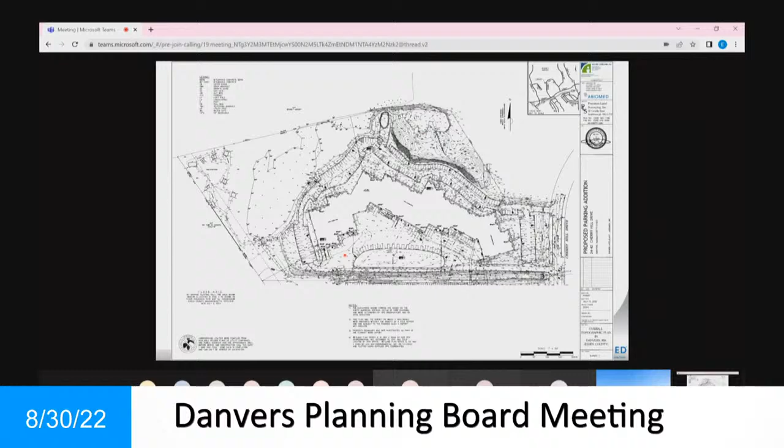Here is an overall schematic view of the existing conditions of the entire site. Just to orient the board more specifically, I'm going to trace out the limit of work where the project is, so if you could follow my cursor. Just to be clear, the entire site will not be disturbed as part of the scope of this project. The only area that's going to be disturbed is within the project limits for the parking lot expansion project. So just a closer view of the same area that I traced out. This is the project limits. This is the area where there was a mulch mound that, as you're going to see in the next slides, is going to be transformed into an expanded parking lot with site amenities.

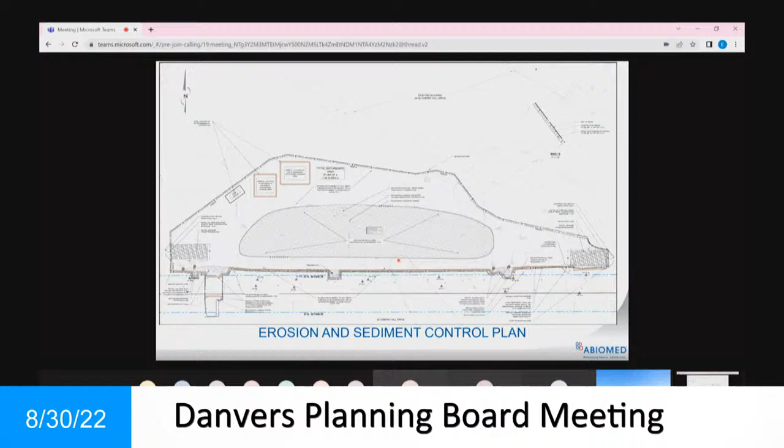Some other site amenities include lighting. We placed lighting in a fashion to promote safety within the parking area. I believe we have our lighting consultant available that could embellish on that. They weren't able to join? Oh, okay, I apologize.

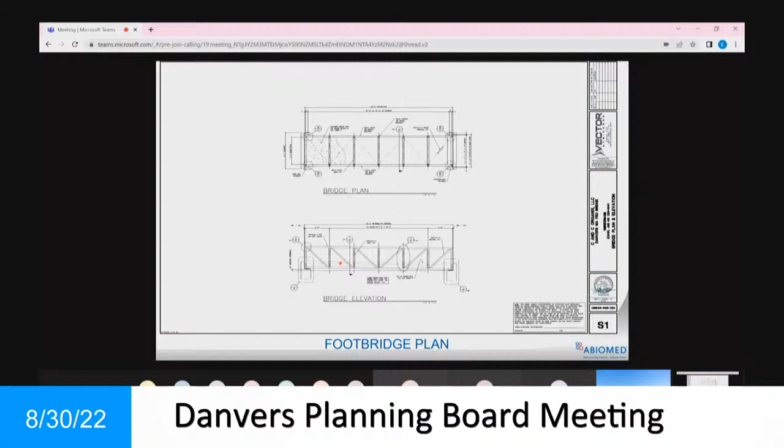It's considered a redevelopment, and it satisfied the conditions and regulations by the local town. It was vetted by the engineering department, and it turns out that we satisfied all their questions and concerns. I just received an email with 3 de minimis comments from the engineering department that I'm confident we could rectify via conditional approval.

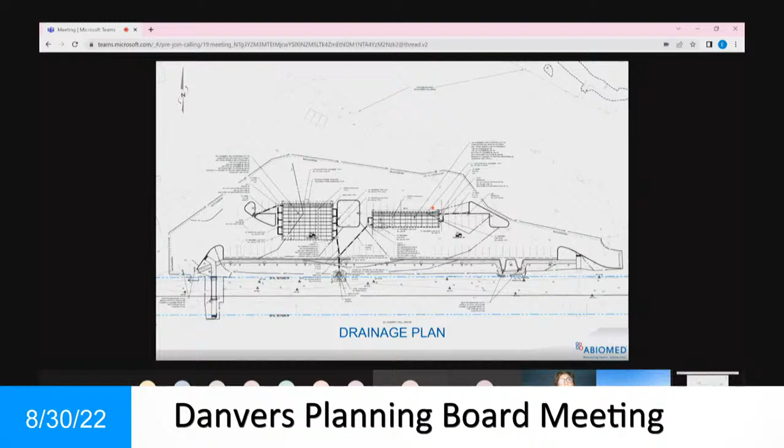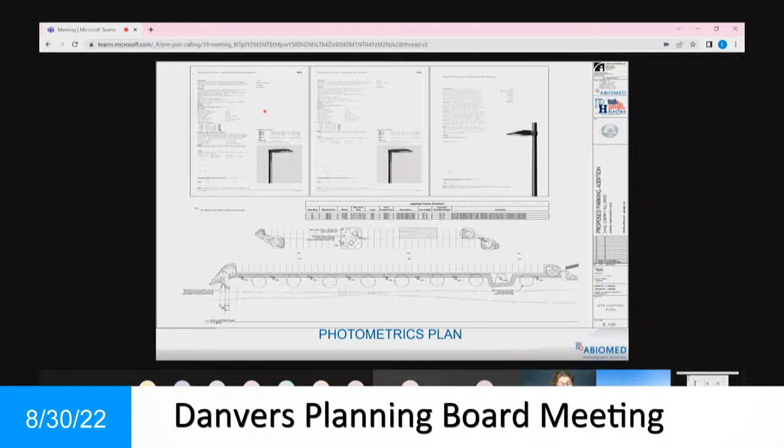The specifics on the lighting is here, and we'll open it up to the board once the presentation is over if there's any questions. This is a photometrics plan. The main purpose of this plan is to ensure that light coverage is in a fashion to facilitate safe illumination. The foot candles on the property line are within standards. It's less than 1 foot candle, which is pretty much a typical standard for a photometrics plan. And I believe that this plan satisfies the requirements from an illumination standpoint as depicted in this slide.

I'm going to turn it over to Shara Lewis, who is the OPM of the project, and she's going to go into further detail relative to the landscape plans. Thank you.

So the plants in the planting bed were picked to be pollinator friendly, which was something that the Conservation Commission wanted. And anywhere where we're disturbing within the buffer zones, which is again a Conservation Commission requirement, we'll have that conservation seed mix. We didn't put the details of the plants here, but I'm happy to answer questions if people have questions about the plants. I'll turn it back to Danelle.

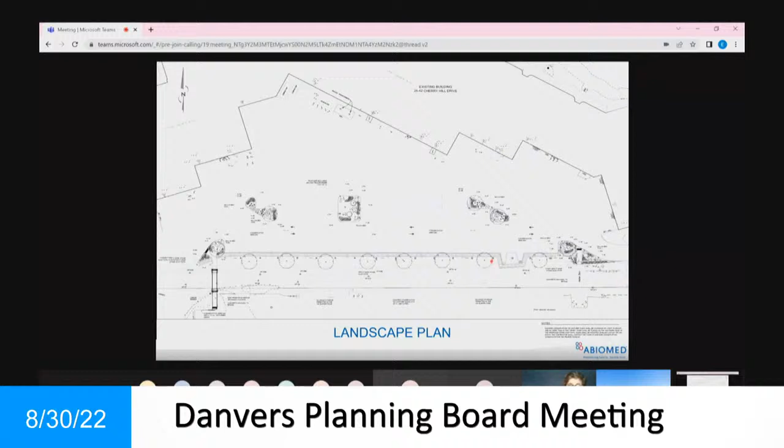Thanks, Shar. I appreciate that. We do have a plant list, but I'm probably going to go to questions, and then we could finish that up. So if I have permission from the board, I'd like to open this up for any questions that anyone may have. Okay, thank you. Jean, any questions at this time?

Yeah, just curious, what is the reasoning for the increase in parking? I'd like to turn that over to Kirsten Skibby to answer that, please. Yes, good evening. I'm Kirsten Skibby. I'm a project manager with Abiomed. We're looking to expand our parking.

Some time ago, we started leasing space in 24 Cherry Hill Drive as we were running out of space in our headquarters located at 22. And we find that over the next few years, our head count is going to increase. Our company is growing, and we took the opportunity to purchase 24 Cherry Hill Drive just to allow us that growth over the coming years.

Okay, thank you. Questions, Tori? No questions. Lou? Yeah, a couple of questions.

Just with respect to the, and perhaps staff could help me as well, I know the applicant indicated that the waivers that they were seeking, I think it's section 4.3.5, street layout and profile plan, and 4.4.2, a traffic study. In terms of what I've seen in the proposed decision as well as the staff summary, I didn't see those listed, and there were other waivers as well. So I'm just a little confused in terms of what waivers are actually before us.

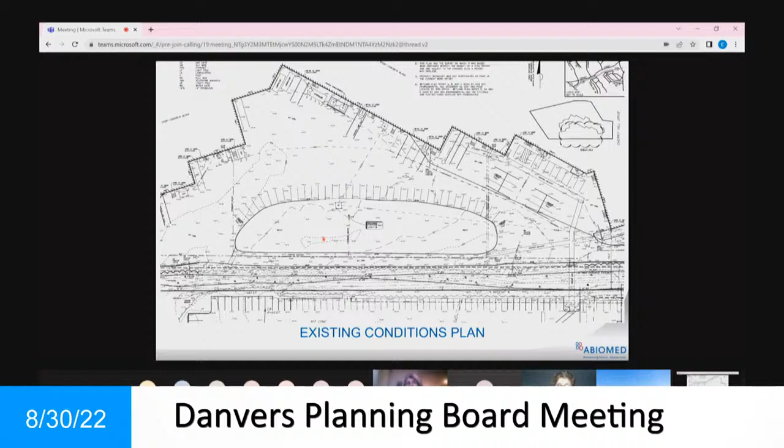If I could just add to that, the oval area in the middle last year was a big green mound, like a big green hill. When we were doing another project, a fitness trail around the campus, we were going to go up and over the hill, and then we decided to take down the hill. We worked with the Conservation Commission on that, and when we flattened it, it became apparent that it would make much more sense to have more parking there rather than this hill that was an obstruction. What's the maximum number of parking spaces that you can have on the site?

The maximum amount numbers? Yes. Well, I don't have that value, but I know that there's a minimum requirement of 170, and there's an existing of 283, and we are providing 345, which is a surplus of 62 parking spaces. I'm not familiar if they have a maximum, but I would kindly do that research and provide it to the board as soon as possible.

Do you know that, Josh? From a zoning perspective, there is not a parking maximum in the parking table. Okay. Do we know how much of the landscape percentage is and how that's been affected by the additional parking? Reduced? So from a green space area, we are decreasing that area by about 13% from green to pavement.

But I would like to bring to the attention that most of the impervious area is pushed out from where it was before. So if you could see my cursor, I'm going to draw the existing pavement that was there before. We're actually replacing this area with green area. So we're actually moving away from the resource area. So most of that new pavement area is going to be seen here, where the old mound that Shara described.

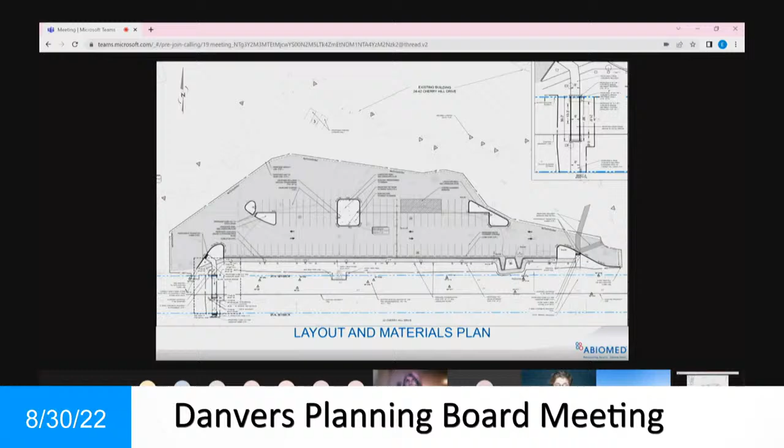Any further questions by the board? Is he going to get us the info? No, just looking for that percentage if you can get it. Okay. Could you clarify, you're asking for the percentage of plantings on the overall site and the percent change of that? Right, exactly. Okay. I know you added some, I think, in those beds in the parking area. Yeah, I think he's working on the overall site.

While Danelle's working on that, I'm sorry he didn't have that calculated beforehand, but is there anything else that we can answer while he's figuring that out for you? I don't believe so. Staff have anything, or the board further questions? I'm trying to make the calculation myself here because I think it's in the application.

Well, it's not going to affect the vote, but it'd be good to know what that is, because it's not a requirement in the zoning district, but we usually like to hit that mark if we can with site plans. So I would ask that at this time, we get a motion to close the public hearing.

So moved. Do I have a second? Second. All in favor to close the public hearing? Opposed? None? And Lou, you have a motion?

I do. Thank you. Site plan review, 24 to 42 Cherry Hill Drive. Date of application, July 22nd, 2022. Date of hearing, August 30th, 2022. Date of decision, August 30th, 2022. The Danvers Planning Board finds the site plan submitted by Abiomed, Inc. for property at 24 to 42 Cherry Hill Drive, Assessors Map 29, Lot 3, to be in substantial compliance with the criteria and regulations adopted by the town.

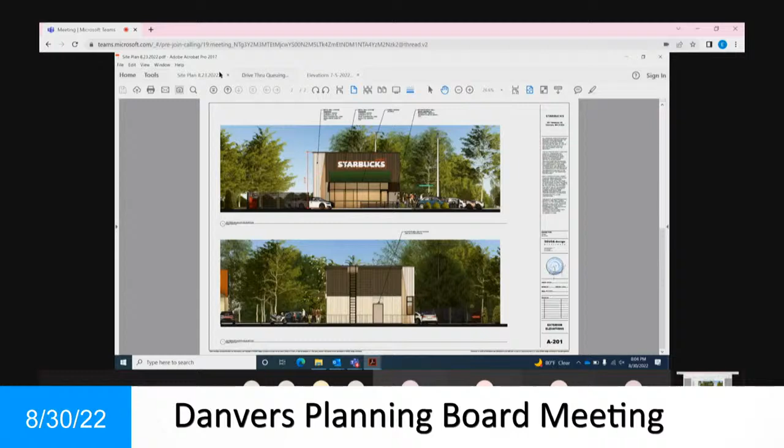We do have wall sconces on the building, so wall-mounted lighting. You have in your package a photometric plan, and we'd be happy to answer any questions about the lighting fixtures. So at this point, I will turn it over to, I believe, Bruce Comack, who is going to present the landscaping.

Feel free to use the pointer. Can you put up the landscape plan? Great. My name is Bruce Comack. I've been doing landscaping in the North Shore, Peabody, Danvers, Middleton area for 44 years.

We were asked to design for the new Starbucks coffee shop. Starbucks has certain requirements, so we tried to design within their requirements. But because of the water problems in Danvers, we also had to make it so that the site required very little water. So basically, as far as shade trees, we chose ginkgos. Ginkgos are pretty much the hardiest tree you can buy and plant in the Northeast, that's for sure, but pretty much the northern tier of the country.

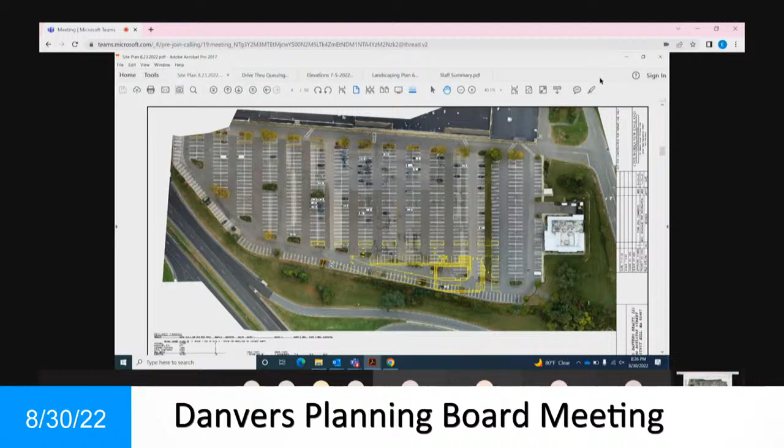And it would have to say Starbucks, because I think under the bylaw we're supposed to have the name. So maybe we can do that. To say, it should say Starbucks drive-through. It should have the name. Okay, so that should be in a condition. Yep. Other questions, Tori?

That's all. Thank you. I just had a couple follow-up questions. You mentioned 55 seats, including the outdoor seating. Do you have a breakdown of the indoor and the outdoor seating? We do not have a breakdown of the indoor and the outdoor seating. So 55 would be the maximum seating in good weather, and it would otherwise be less in the winter. Okay. Will you have a time requirement on how long people can sit?

I'm being facetious. It's Starbucks.

I think we're not even going to... No, go.

Comment. On the queuing of the drive-through, did you give any consideration to maybe splitting that to have two windows, or an order window? I just went through one at Burger King on Endicott Street, which I don't think was in front of this board, but they put another, if you will, screen that you can order from to maybe expedite the vehicles going through and not queuing and causing environmental concerns for pollution and so on.

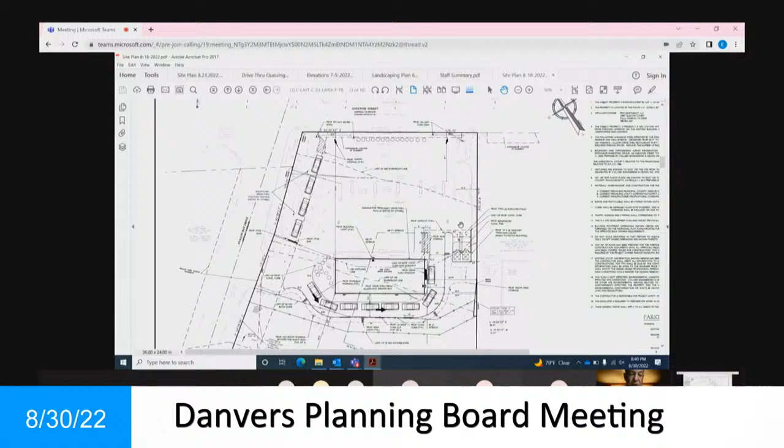PMG purchased the site in January of 2020 and inherited a situation where, under the 2006 approvals, there had not been an implementation of the landscaping or the planting improvement plans in the rear of the site adjacent to Crane Brook, and there was an open certificate of compliance.

We're now seeking to add the single drive-through lane back behind the building, the rear of the building, to serve the Dunkin' Donuts. This drive-through lane is proposed to be 15 feet wide, paved, a single lane, circling around the back of the building, as you can see in this plan. There'll be a drive-through window that'll be added to the southeast side of the building. Also to accommodate the drive-through, 2 parking spaces in the front of the building and a trash enclosure are shifted to the side lot line as approved in the ZBA dimensional variance.

So we have been working on this project for about 2 years now, and we've received the following approvals. First, we've had several conversations with MassDOT, which has advised that it would have no objection to the drive-through so long as it's approved locally, and if we made certain minor improvements, which are included in the site plans which we have provided to you. The ZBA granted a use variance for the drive-through. It also granted dimensional variances. The dimensional variance was the side yard that I mentioned before for the trash enclosure. And the parking variance was really offered simply to maintain the existing parking of 12 spaces. We did not reduce the number of parking spaces at the site.

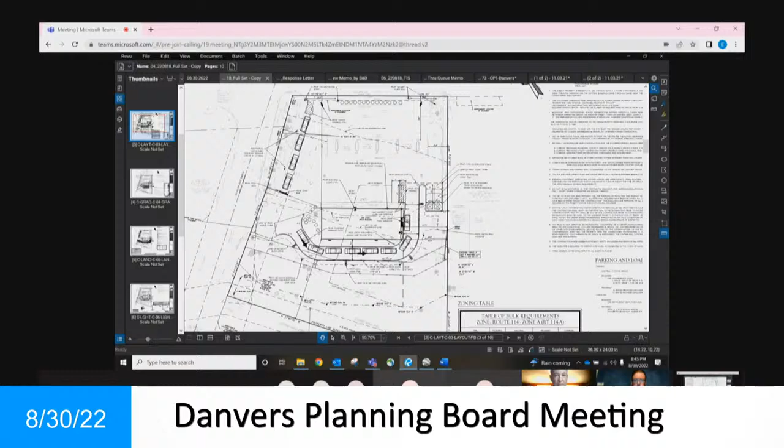So, as mentioned, the plan which Josh was sharing before, I'm sharing my screen now. The applicant is proposing to put in a single lane drive-through, which wraps around the back of the building. And a drive-through window will be added to the existing convenience store with the Dunkin', and there will be some internal floor plan modifications required for that as well. But the building footprint is unchanged, and the elevations, aside from the window being added, are also unchanged.

The drive-through lane was kept almost exclusively within that grass area because of the width, which was discussed at length with the Conservation Commission. It does encroach into some of the wooded area, and as Brian mentioned, there's a robust stormwater system that is proposed as part of this improvement, as well as landscaping provided in that area, and additional landscaping that will be proposed in the island along the northwest corner of the property, at the corner of the intersection of 114 and Avalon Bay Drive.

From the window back to the limit of the drive-through lane, 8 cars are depicted here for stacking or queuing of 8. And then we provide queuing for an additional 4 vehicles along that island. It will be signed with additional drive-through stacking signage. There'll be a stop bar painted so that the access to the driveway on Avalon Bay Drive can remain.

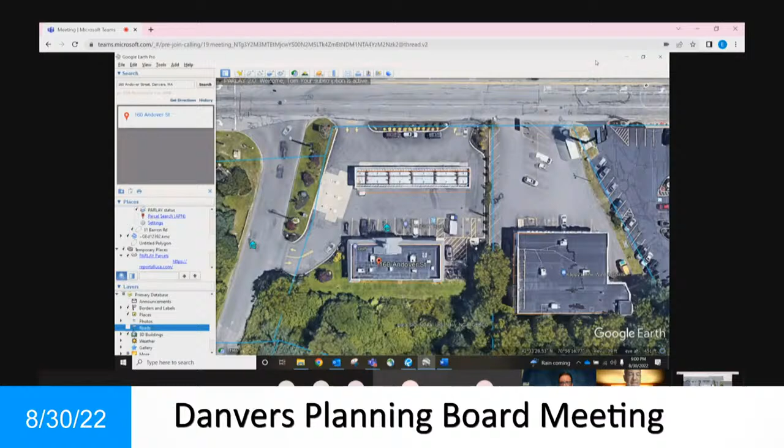And as part of the order of conditions from the Conservation Commission, that operation and maintenance plan does require the cleaning up of the area behind the building. There are some invasive plant species that have to be removed, trimmed back. There's some asphalt piles that I think were there from the prior owner and the 2006 site redevelopment. So that's going to be removed.

So it will be cleaned up considerably, and then kind of replanted in this manner shown here with, as Brian said, a strong operation and maintenance plan that is also part of the order of conditions with the Conservation Commission.

Are we doing away with mulch using stone? We aren't actually showing any mulch on the plan. We do have a kind of a seed mix going down here that's appropriate for this type of area. Yeah, we don't want mulch because of the chance of fires with people throwing their cigarette butts out the window while they're waiting for the coffee. Yeah, no mulch proposed there.

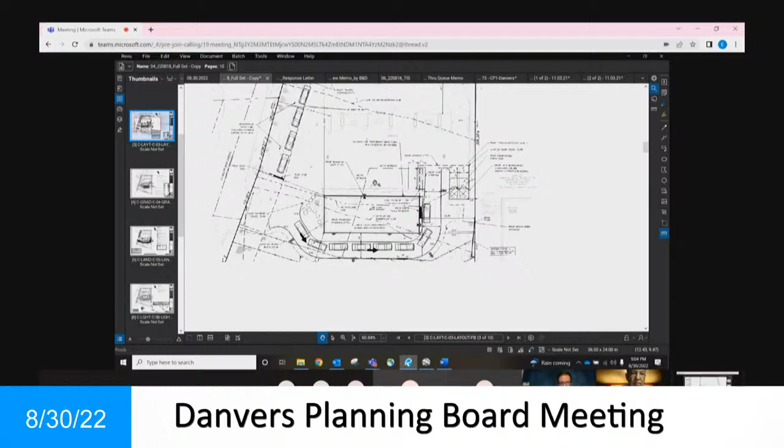Other questions from the board? Yes, I have a question. Lou? Yeah, just a question with respect to the general conditions. Just a clarification, is it 6 feet or is it 12 feet? 12 feet. My apologies, it's 12 feet. That was adopted by the board, so that's already in a general condition. 12 feet. Okay. I just wanted to clarify that.

Thank you. This is a public hearing. Any questions from the audience? Now's your chance. Hearing none, I would entertain a motion to close the public hearing. So moved? Do I have a second?

Mr. Chairman, before we close, I just wanted to note that there are 13 submission requirements from which we're seeking a waiver. Presumably, those are in the staff report somewhere. I just want to make sure you have those. Yes, those will be read as part of the decision. I have 8, but I think a lot of them are going to be a formality. Thank you. I think the major ones we've already discussed.

Yep, thank you very much. Okay, so at this point, I would entertain a motion to close the public hearing. Did I already do that? So moved. Second by Tori, moved by Lou. All in favor? Aye. Opposed? None. And now we have a motion.

Lou? Yes. Site plan review, 160 Andover Street, date of application, June 16, 2022. Date of hearings, July 26, 2022, no public testimony. August 30th, 2022. Date of decision, August 30th, 2022. The Danvers Planning Board finds the site plan submitted by PMG Northeast LLC for property at 160 Andover Street, Assessors Map 55, Lot 11, to be in substantial compliance with the criteria and regulations adopted by the town.